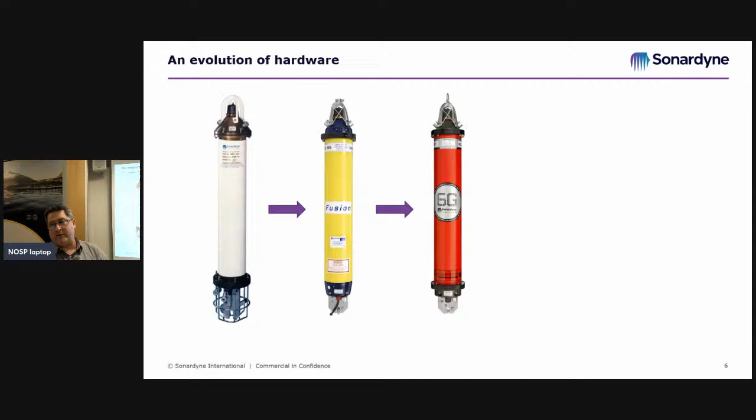But in 2010, we went with the Compatt 6. So 4 to 5 to 6, we're not very imaginative when it comes to naming our products. We just increment the number until we got to this one, which is a 6 plus. The idea being it wasn't a big enough change to make it a 7, so we just came up with a 6.

But that brought in another level of digital acoustics. So the yellow ones were our first generation, the reds were the second, the grey ones brought in the third, and that's where we are now.

So where we're going is what I'm going to talk about. And I've just got to completely put people's minds at rest - this is not a Compatt 7. So anybody who uses Compatts, I'm not talking about that. I just used that as an illustration of the development. There is no Compatt 7 yet.

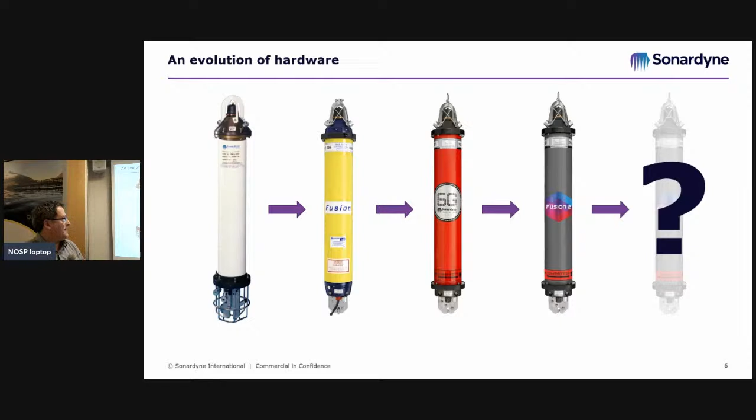So in my days offshore, thinking about how things connected and how we wired things together, it was - I wouldn't say simpler time - but it was challenging because we had different communication schemes within equipment.

For hardwired umbilicals, so solid copper umbilicals, we would go with 2-wire or 4-wire current loop kind of comms, which were notoriously unreliable. If the umbilical capacitance was too great, these comms just died. It became a real problem, especially when trying to fault find offshore.

I'd go on a boat, get shouted at by the party chief. I'd say, sorry, but your umbilical's not good enough. He'd say, no, it's not, it's your equipment. I'm going, no, it's your umbilical. It's your equipment. So it got into a bit of a boxing match there.

When multiplexers came in, we started looking at serial comms. So you're looking at RS-232, then kind of 422, 485, half duplex, full duplex, things like that. And then power was another problem. You always had different powers available on vehicles, 24 volts, 48 volts, 110, 115, 120. You just basically turned up to install a bit of kit and hope for the best and try not to blow things up.

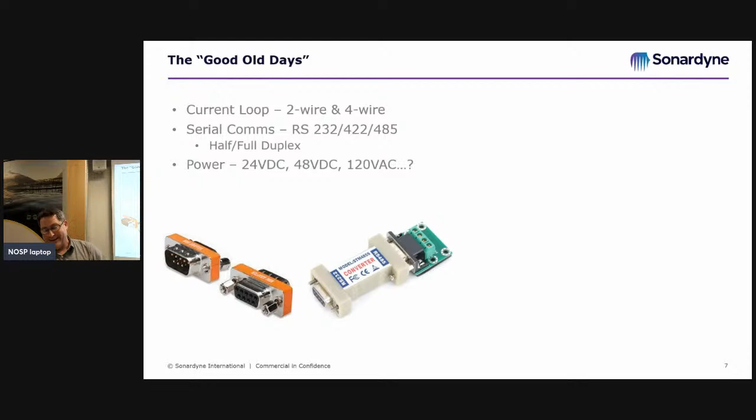But every offshore engineer, when I was doing it, always carried a pocket full of null modems, always carried RS-232 to 422 converters. You never knew. And then you'd have to try and figure out how to wire something in. So I guess what I'm trying to say is, in the good old days, it was an absolute nightmare.

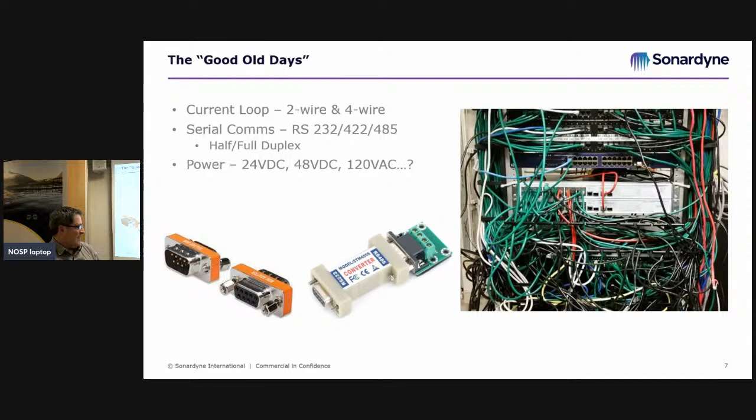And this is kind of the point I'm trying to get to with the presentation: if we standardized all this, things become a lot easier. So that's going to be the general message of this presentation.

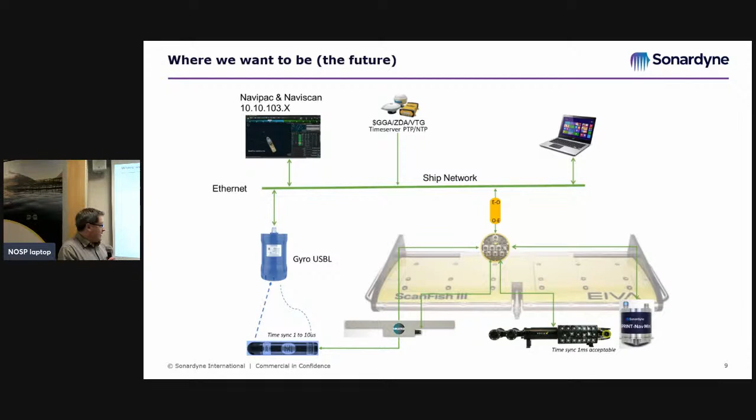So the first thing we need to do, if we're doing everything Ethernet based, is to look at power. Now, there is a thing, power over Ethernet. There are various schemes of it. We've implemented that already in a couple of our devices, and the plan over time is to implement it into all of our subsea products. So it's simply that Ethernet is able to power a connected device. There are limitations with it, which I'll get to.

And why do we do that? Well, you can see there's cost savings in the installation. Everything becomes a lot cheaper to do it that way. We're not looking at specialized connectors that can handle heavy power or fancy cabling. It becomes quite simple. It's flexible, so there's a lot of flexibility built into how you install these things.

Centralized power management, well, it's all run through the Ethernet system, so there's no real power management. It just has to be able to deliver the amount of wattage needed for the connected devices. And in theory, there's fewer points of failure. That's the important one, you're taking out a lot of potential failure nodes. A complete survey spread on a vehicle is quite a complicated system, so if you take out as many failure options as possible, it makes life easier for the guys working offshore. So we've already implemented one of the power over Ethernet standards, the PoE Plus.

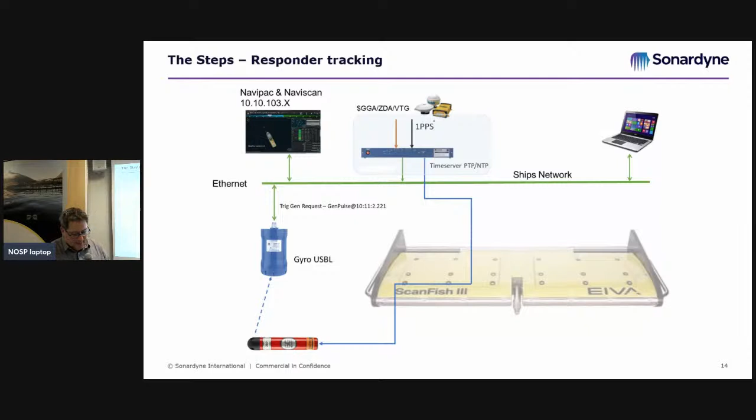So they get their master time sync from GPS. It's normal, but they're now broadcasting onto the Ethernet. And the gyro, the USBL transceivers, do a trigger generation request. The time server pings, hears that, sends its message. The gyro knows when that thing did its ping, then it'll work out the range and bearing. Again, that takes away quite a lot of cabling and hassle you would have had in the old way.

So again, a little bit more complicated. We're bringing inertial now into the target we're trying to track. In this case, we've actually plugged the transponder into the inertial device. And that's one of the things, because we build that and we build that, it's easy for us to support integration, hardware integration into the devices.

So again, we're using a time server to generate the master kind of timing sequence. That gets down to the beacon, it transmits. At the same time, the INS knows when it got pinged. And then when it works out the position of the beacon, the USBL system passes the position back down to the INS. So we're constraining the INS drift as well. So that's a kind of fairly simple INS and USBL setup.

And you can see there, if you look at the line, there's actually not a lot of cables there. We're not sending huge amounts of data through serial cables. We've got standardized Ethernet telegrams that we're just passing around the vessel, and the equipment just picks off whatever message it needs.

Then just going forward, you're adding more equipment in. You need some good quality subsea multiplexer. I don't know who builds them, Stig.

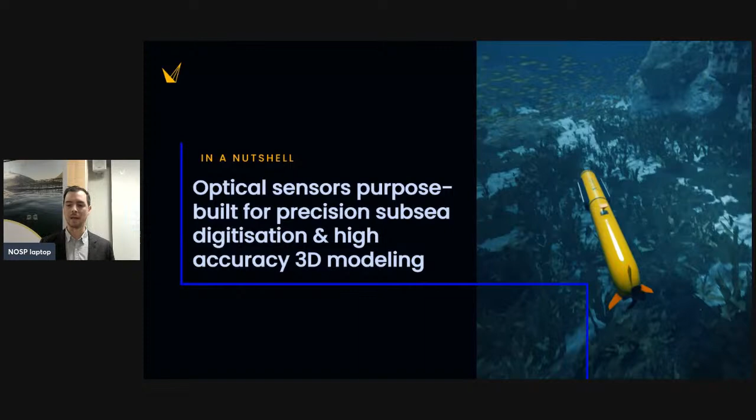Brief introduction: Voyis as a company, in a nutshell, we're making optical sensors purpose-built for precision subsea digitisation, mainly for high-accuracy 3D modeling. That culminates in a few categories of products. First and foremost, underwater laser scanners, using a laser line projector to project a line onto the surface, seeing that line with a camera. That camera is at a bit of an offset, triangulating points along that laser line in 3D space to produce an XYZ point cloud model. We also have some cameras and lights for really high definition, very crisp imagery subsea while on vehicles moving at very fast speeds. We've taken the camera and laser concepts and started to build these pre-packaged payloads for AUVs and for ROVs.

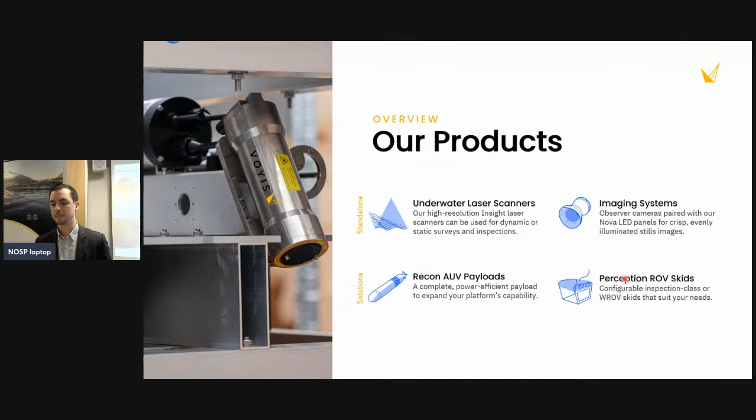A little bit more about our company. We are headquartered in Waterloo, Ontario, Canada. One of the things we're proud of is we were one of the first dynamic laser scanners on subsea vehicles. That was the Hugin, manufactured by Kongsberg in Norway, for a company called C&C, now Oceaneering. We had our laser package on there back in 2011, flying over hundreds of kilometers of pipeline and producing 3D models of those underwater assets.

And like Alan said, we are part of Covelya Group as well. This acquisition happened 2 or 3 years ago. It's been a really great experience to be part of that acquisition. There's quite a bit of synergy between these companies that are all subsea, many sensor companies owned by the same group. Especially Sonardyne, which makes acoustically aided inertial systems to understand where the vehicle is moving subsea. Wavefront makes some side scan type sonars, and Voyis comes in with the optical imagery and the lasers, with EIVA, a topside navigational software company, amalgamating all these sensors and presenting it to the user in a usable way in real time topside.

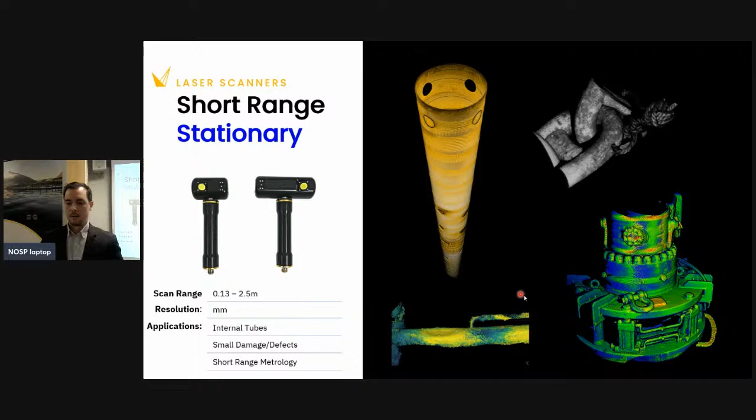A couple of years later, based on that short-range technology, customers came to us and said, that's great, but can you do it longer range? And can you do it on a moving vehicle? So not stationary anymore, but utilizing the inertial navigation system with the laser scanner to project a laser line at the surface and fly over seabed, producing a 3D model using all these sensors.

So we made this long-range laser scanner, same concept. You've got a laser emitter on one side, projecting a 50-degree laser swath onto the surface, and a camera specifically designed to see that laser. Because of this known offset, we've calibrated it so we can triangulate that laser line in 3D space.

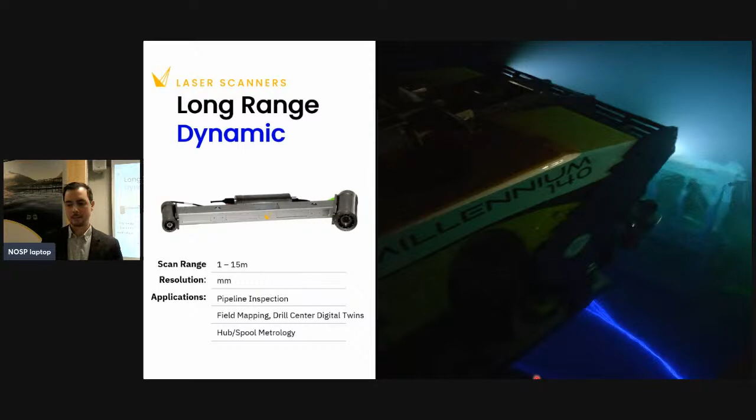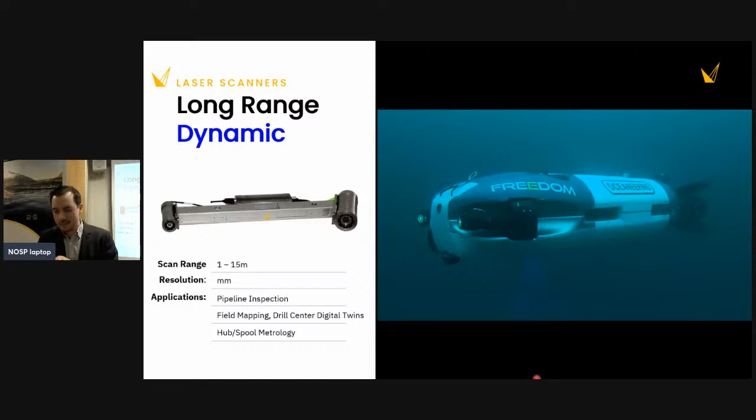We've seen this being used on AUVs and ROVs for pipeline inspection, full field maps of drill centers, essentially creating a digital twin of your subsea assets. Here it is on Oceaneering's Freedom vehicle. You might not be able to see it well on the projector, but you can faintly see a 50-degree laser swath being shot out of that.

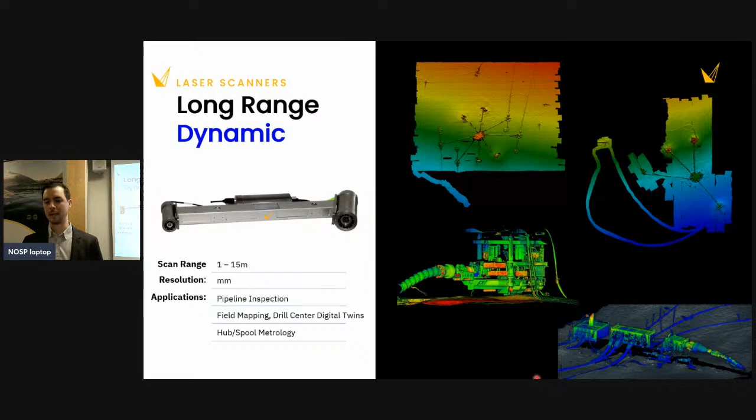As I said, some of these drill centers do a sort of lawnmower pattern, back and forth, building up a full wide digital twin of the area. But if you were to zoom in on any one of those field maps, you'd get down to the resolution and accuracy that you see here.

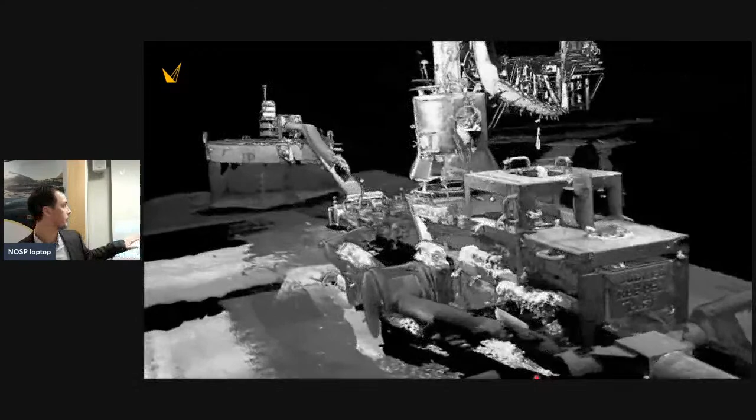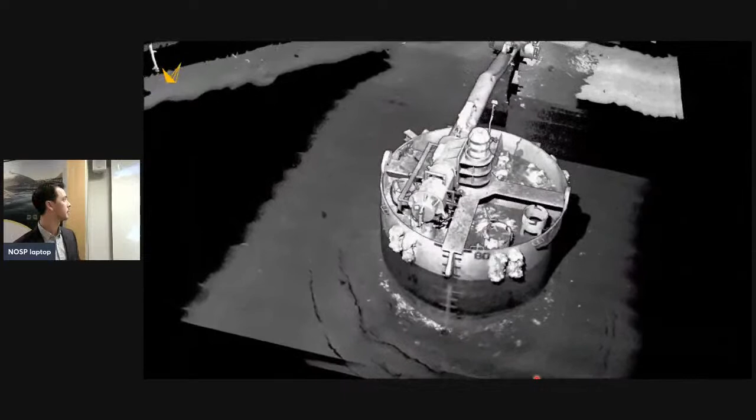And this is only laser-based systems, none of our stills cameras involved in this. Again, all collected dynamically. So as the ROV flies from point A to point B, all that data is being streamed topside, presenting a result like this.

To give you an idea of a data set of this size, to collect it probably takes on the order of 10 to 15 minutes.

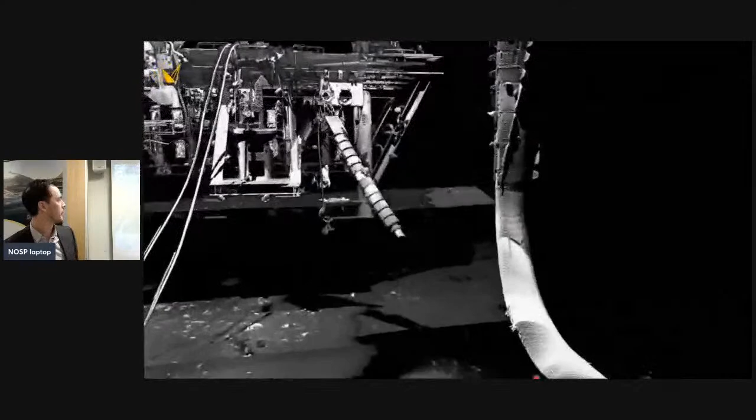Flying over the jumper to the manifold here. We've been used for jumper metrology, spool metrology, so tying in a plet or some other structure over to the manifold, figuring out the relative X, Y, Z and yaw, pitch, roll of those two hubs or flanges, and then allowing the customer to build the spool piece.

I've actually worn VR goggles and dove into some of those drill centers, and it's quite different from looking at it on a computer screen. The size of these structures is immense.

So moving on from the laser scanners, we started to develop a line of stills cameras and lights. The idea being that some end clients wanted the stills imagery, and some of our customers were using their own cameras with our laser system. But in order to use their own cameras, they didn't want to see the laser in all their images, so they'd have to inhibit our laser, stop it, take a quick picture, and start the laser again. That all happened in software, but still, as we're flying over a pipeline, you'd see a gap in the laser data every so often, and it's not that pleasing to the eye.

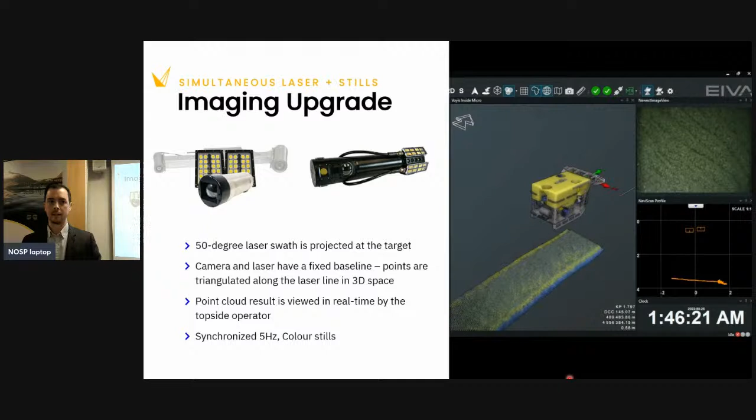So we decided, you know what, we'll take on the camera side of things as well. We have very tight timing on everything, doing up to 50 laser lines a second, collecting those all in real time, and in between the pulses of the laser, we're able to flash the light, expose the camera, and collect an image all before the next pulse comes.

So the software here, that's from our sister company, EIVA, is amalgamating all the sensor data. You see our images being collected up there on the very top left, and the data coming in as point cloud data.

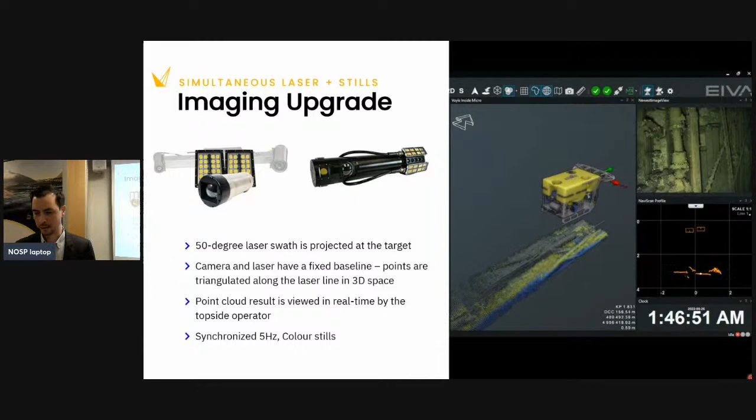Here we are. We were used on the Endurance mission, surveying Shackleton's famous shipwreck under the Antarctic ice. A very similar package to this, laser scanner and camera installed on a Saber-tooth vehicle, 3 kilometers deep in the ocean, surveying that wreck with both the cameras and the lasers.

And then, so we had the cameras, we had the lasers. What we were finding was that customers have all sorts of different vehicles. Even if they had the same vehicle as another customer, let's say some sort of AUV, it might be a different rev, a different year, a different model. And it was always such an engineering feat to figure out how to make our systems first mechanically fit, and second, communicate with their vehicle systems.

So we decided to pivot from that idea and try to make modules that work directly with the vehicle manufacturers. We felt like we could reach a broader audience with our sensors if we worked with these vehicle manufacturers.

This is just one example, but this is an Iver 4-900, about a 9-inch hull AUV. It looks a lot bigger in that image, but they're really small. It has our camera, our laser, our light, and we manufacture this entire section that just straps onto the vehicle portion of the AUV, giving you the ability to do laser scanning and imaging.

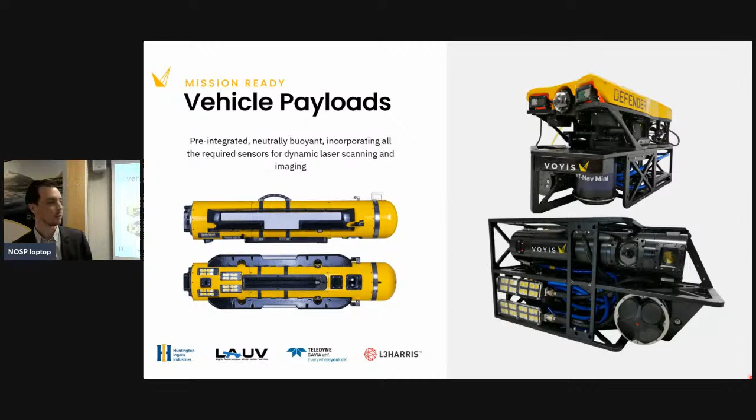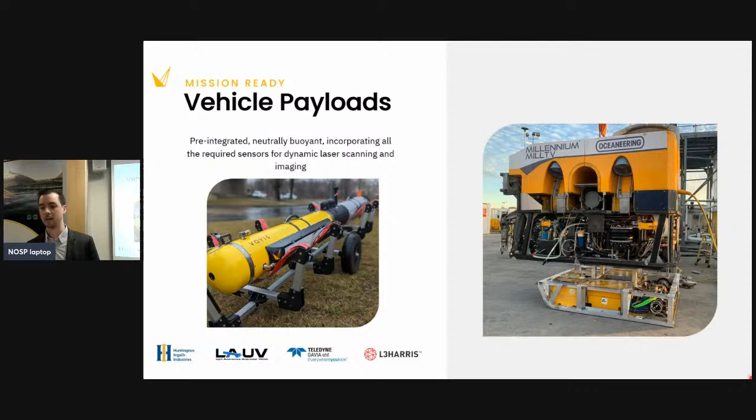I should also briefly mention we still make this work class dynamic scanning skid. It's a collaboration between us, Sonardyne, and Innova. Innova really designed and manufactured the frame of it. There's also an Innova MUX on there, so all the sensors within that skid, everything you'd need to do dynamic laser scanning, goes into the Matrix MUX from Innova, and then it's just a simple one cable connection to the vehicle.

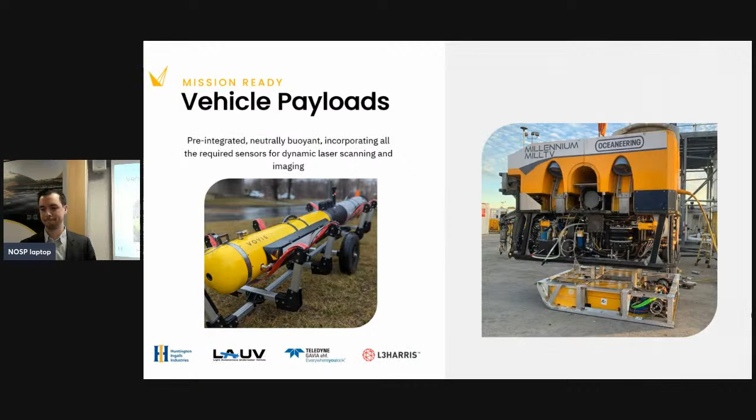So this is where edge computing comes in. I'll give you my basic definition of edge computing, but it's basically placing the computation as close to the edge where data is being created and where actions are being taken.

This largely stems from the industrial industry, where you may have a sensor that's close to an actuation, and that sensor data is being sent to some server or cloud to be processed, and decisions are made and sent back to the actuator. So the idea is, if we can get that computation, that processing, on the sensor itself, right next to where the work is being done, then you can avoid that whole step of sending that information elsewhere.

Traditionally, we've always had some form of edge computing on our products. A lot of the times with our old products, it would culminate in this single board computer, basically just like a PC in a bottle, where we would send our images from our laser scanner and from our camera, do some processing, and spit out a laser stream or processed images. Those would go topside to be saved, to be looked at afterwards.

They could be streamed to a computer running EIVA, so you could see the result of the survey in real time. Or they could be fed to the vehicle to do automated pipeline tracking, auto docking into subsea resident spaces. So that's sort of how we did it in the past.

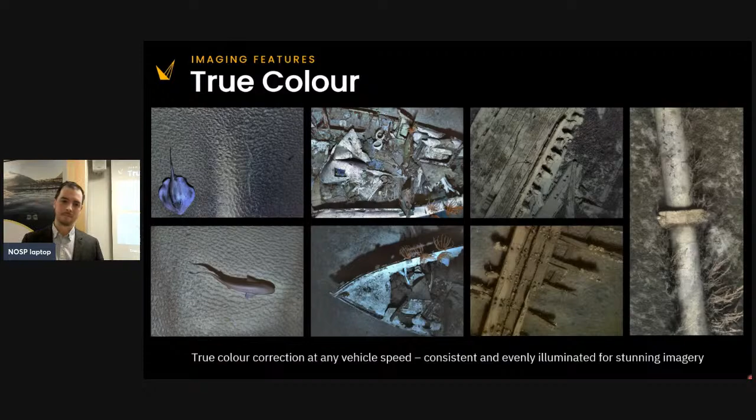I guess because of the way that we're doing this computing, the moment that you pull those images off board, they really lend themselves to stuff like this, where it's a very consistent mosaic where you can't see where one image begins and the other ends. Really great for something like a pipeline where you have maybe some 3D data from a multi-beam or a laser, and then you can drape this mosaic over top of that to get more detail out of the asset.

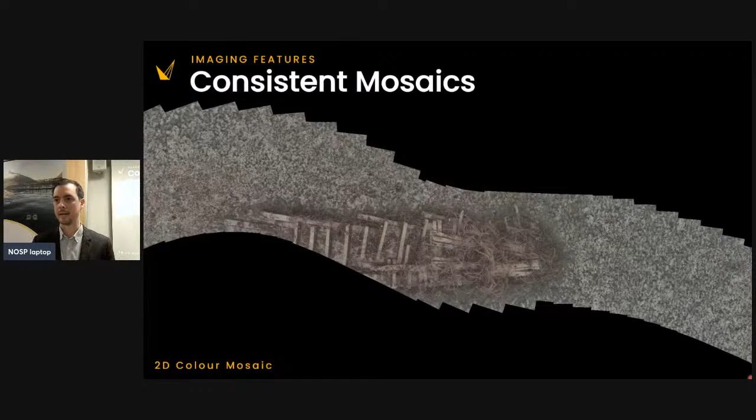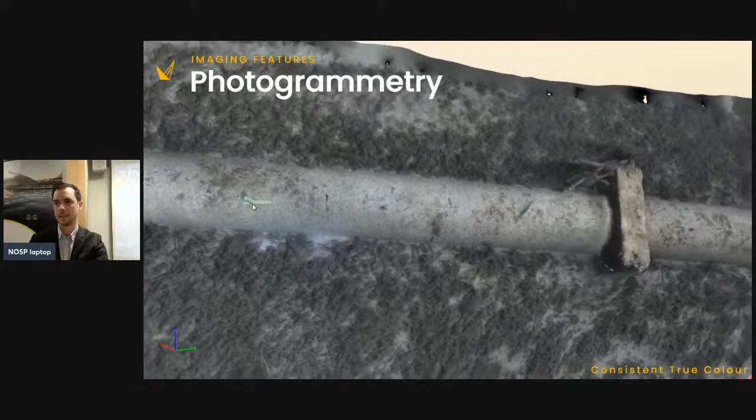Also really lends itself to photogrammetry, so creating 3D models not from laser data but directly from the images. Because of the consistency in the imaging and the lighting, and the way we process those images, sort of mimicking how a camera would work in air, it works really well with some off-the-shelf software. You just throw the images in and it'll spit out a nice 3D model.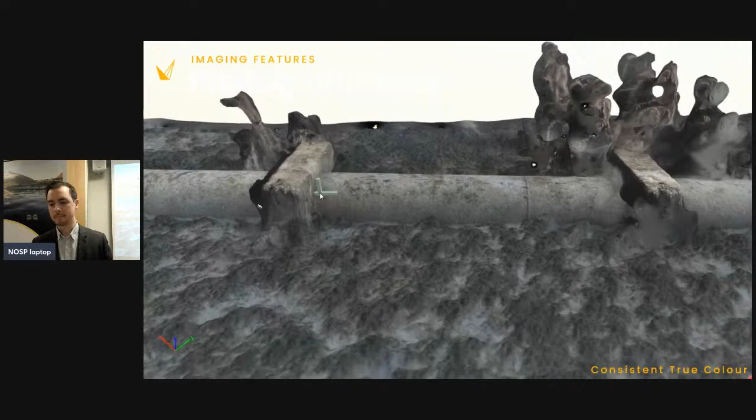So that's sort of the survey side of laser and stills imaging. But where this has all sort of been going over the past couple of years is we've realized that with this edge computing technology, we should be pushing more into the video market. So we have what we're calling Video Plus, which does video and stills and 3D modeling all in one small unit. We really asked ourselves, why isn't every underwater vehicle outfitted with a vision system capable of 3D modeling?

There's stock video devices on ROVs all over the place. If you try to throw that video randomly into a photogrammetry software, generally you'll get subpar results just based on the spec of the camera being designed specifically to collect video and not necessarily to 3D model.

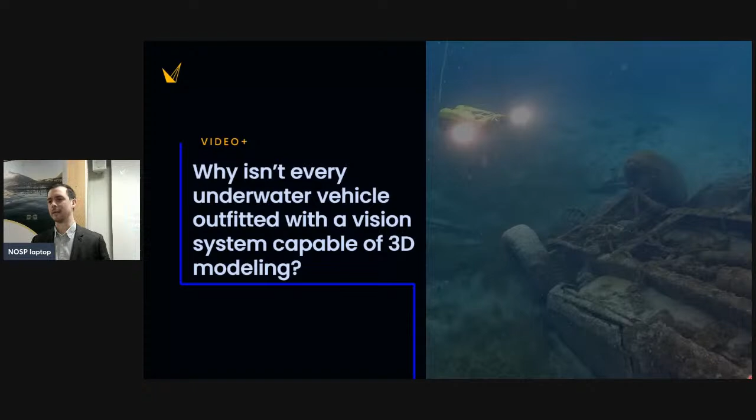So this is a small little camera we developed. Again, the VideoRay Defender there, if anyone knows that vehicle, it's pretty small. I'm a pretty small guy, but I can lift it up and chuck it in the pool. Yeah, it's small, and within this camera bottle here, we do have one of those edge computing devices in it that's capable of doing many things.

So the way that we've sort of approached this video is we've done a stills to video approach. It's actually exposing the camera with its global shutter 30 times a second. Each of those images is going onto that embedded computer board. It's being undistorted, leveled, color processed, the same way that I just showed you. And then being encoded into video, so that the video that you see is actually 30 rapidly processed stills.

So it's encoding that, streaming that video up. That video could be used for ROV piloting, for a GVI deliverable. But at the same time, it's also able to save those raw stills to a separate location. Those stills actually contain a lot more information than the video—the video does a bit of compression when it creates itself. So it's important that we actually use the separate stills that we've saved to produce the 3D models.

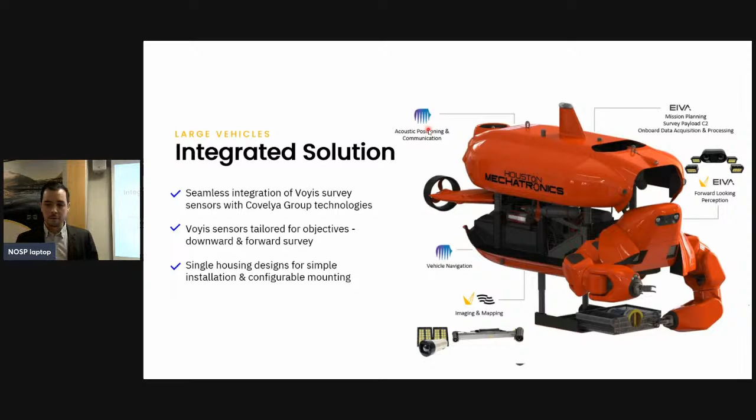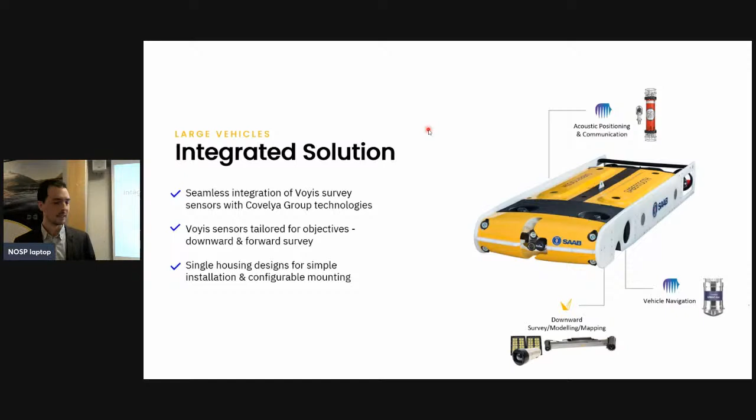Another up and coming vehicle we're on, the Nauticus vehicle, has the full package from Voyis. As I mentioned, Sabertooth—a couple different customers using this, but notably the Endurance mission using the Sabertooth. Oceaneering's new Freedom vehicle is largely doing a lot of pipeline following with that vehicle going on.

And that's it. Hopefully it wasn't too much.

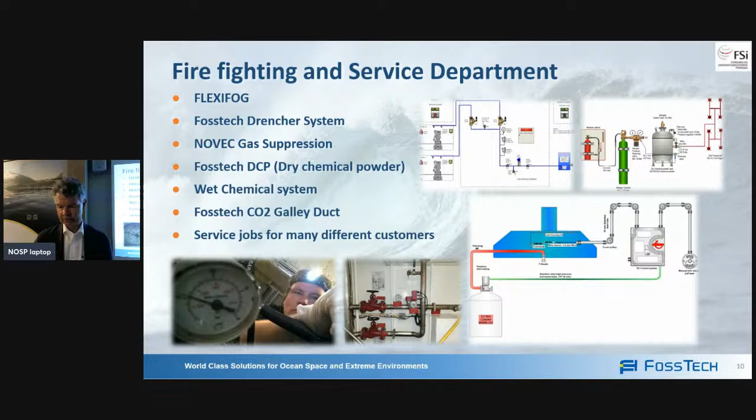A couple of years ago, we took over from another customer a service department, doing service for firefighting for ships. They're big ships, ferries, yachts, and they have to be certified each year. So we have people traveling all over the world, doing service for the FossTech products.

It's important that when we do R&D work, we have facilities to do testing, and we can go to our customers and say we can guarantee it for 25 years because of the accelerated tests. So that's important from our side.

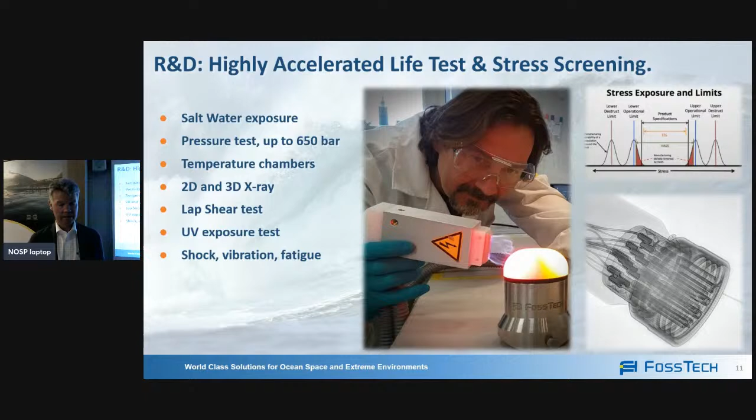Our own products, we have a product called Omicron. That's really good, and we were first out. This is a sensor for measuring gas levels in LNG tanks. I think Omicron means a small particle, and our sensor going up and down here is what it is.

We've talked about the oil-filled cable, our IP around molding LED lights, our fishery equipment, and the firefighting systems. I have a couple of products there. Lately, we have set up a production line for batteries for bigger ships, and batteries are coming more and more. What is special?

What we do is mold the batteries in a fire-resisting molding mass - you can see the yellow ones here - and you can put it in water if you want. There have been some fires on ferries with batteries, and this way of doing things takes care of security, and you can also cool it with water if you want to. The old batteries for ships had to be put in a container and cooled inside the container. So we look forward to getting this into the market.

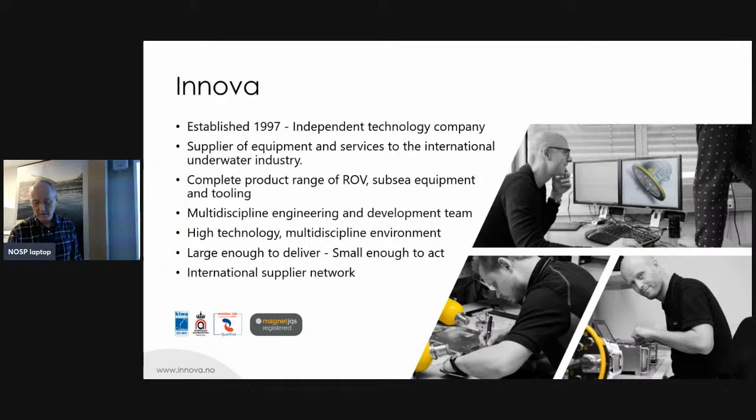We like to promote ourselves, both to customers and possible employees, as a high technology multidiscipline environment, with the statement: large enough to deliver, small enough to act. We have a quite strong network of sub-suppliers on engineering disciplines that has enabled us to do some really interesting projects. We also have very good cooperation with companies like Sonardyne that we work closely with, both on the product side and on developments, aiming to standardize what we're doing.

That gives quite a pointer in here - is it live, or I need to see if we can do that without ruining anything? So there, it is on this screen - but no, here it is.

Right, there you go - control electronics, mostly for pressurized environments. We don't pot things as much as you do; we're very much putting it in oil to be able to. This board, I think, is one of the first things we did, and that's just an example.

I think we're now on a new version doing really the same thing, just including more Ethernet, which we'll come back to. I think this is sold in close to 1,500 examples, sitting worldwide in equipment from Scanmudring's excavators to Frank Mohn's oil skimmers, and a magnitude of kit you really wouldn't imagine. But the core is really oil and gas related remote tooling and ROVs of any kind - so it's a proportional valve controller and then a set of I/O running on a serial line.

Camera and video systems, we don't make them ourselves - we sell them on behalf of others. Hydraulic valve packs - that's almost entirely built in-house, buying valves, making everything else. Fiber optic systems, we'll come back to that in more detail. We have good cooperation with Forum as the rep on ROVs, also selling their thrusters, the previous Sub-Atlantic range.

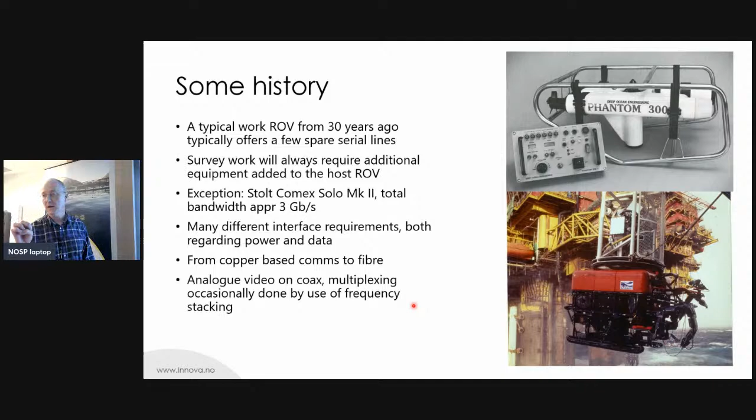Your baseband video is like 5-6 megahertz from 0 and up. It's what you get when you run a standard monitor if you don't have any receiver involved. In the old days, you had to go and tweak the channels on your TV in the UHF and VHF band - you were changing the frequency you were looking for. And we built systems when I was at Oceaneering to use a similar system to run many cameras on one coax, because that was the only thing that was left.

More history, and this surprised me a bit - I tried to find out where all these standards come from. When I went to Ørlandhaug, where you guys are from, it was RS-232, RS-485, and I don't think they mentioned Ethernet. It was actually existing at the time, 1993. The ROV system over at the Dolphin's ROV from around 1992 still doesn't have any Ethernet bits and pieces in it at all. Ivan Brems, one of my colleagues, used to work there for many years, and he said it's still copper-based, and so on. The specs are actually quite old, as we can see later on.

The specs we are looking for that Alan also mentioned are close to 15 years old. Some of the bits and pieces we need are 5 years, but they've been around for a while. We are possibly not the last industry in the world to adapt these things, but we are certainly not the first. We're not a consumer gaming environment, but I think we are on equal footing with perhaps aircraft industry, medical, and so on. The speed at which we're able to use the standards existing may be improved a little bit, but that needs to be a joint industry thing.

We have latency there. Some of the equipment built utilizing really old style stuff is built 5 or 10 years after the appropriate standard actually existed.

One example is PECL, positive emitter coupled logic, introduced by Kongsberg and Reson approximately at the same time when they started building multi-beam sonars that needed more than 100 megabits. But it was still many years after the gigabit standard existed, there was no hardware available, and you couldn't really count on the ROV to be able to transfer it.

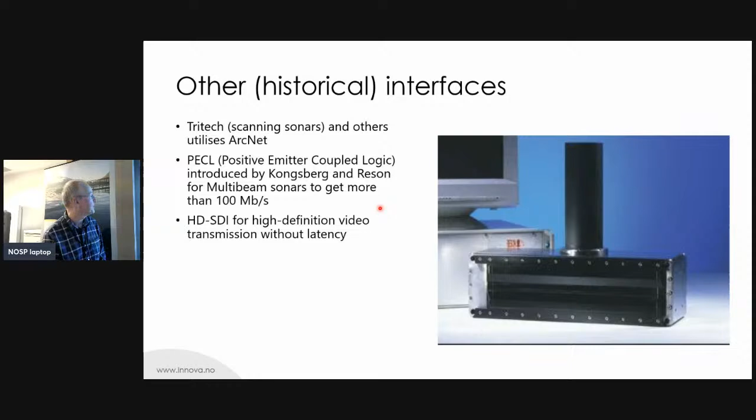Moving to the present: the majority of ROVs still do not have a lot of capacity. There's one or two exceptions, there might be more of them, but we know of these quite big vehicles made by Kystdesign. I think they made 2 or 3 of them.

I guess you might be using them in some contexts. I don't know. Have you seen them in use? Yeah, and I think the first customer was MMT.

I think that was made to be able to run 8 knots. When I talked with some of the people using it initially, they were scared to death when running at 8 knots really close to the seabed.

I think one of the first jobs they did was a survey from Iceland to Scotland, and I think they did it in 3 times less time, vessel days, than they usually have. But it's a very specific thing, you can't use it for anything else. It's expensive, and it's based on the same electronics all the way through, the same fiber optic board or the full package. So we're involved in that one.

PECL has been replaced by gigabit Ethernet for multi-beam sonars, and you're also utilizing gigabit Ethernet. That's what you need.

IP-based video is becoming accepted, giving still some latency. You gave us a very good number of that now, and people are accepting it for everything except for the navigation camera for the ROV pilot. They still prefer to have something direct.

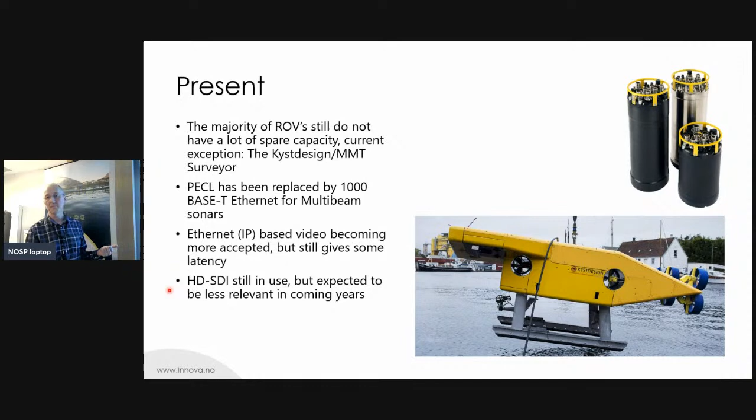On our big muxes, I think it's still standard with 3 times HDSDI, but that's a raw data format, and depending on how much you scan it, it's 1.2 or 2.5 gigabit per second per channel, which is very hungry on bandwidth. That is still in use, but several of our key customers keep telling us that, as we're upgrading all our electronics these days, we might not need to make a new HDSDI board due to the effects you've also been mentioning.

ArcNet has fallen out, I didn't say a lot about it. It was the core of some sonar systems earlier on that just went one step past the serial lines. Tritech used it, Oceaneering used it on ROV control systems in the early 90s, and that was hanging on for quite a long while, but has disappeared totally.

Serial lines, which we could see earlier on, basically started out with the first specs in the 1960s, and were predicted by some really major players in the industry to go away very soon. That was like 3-4 years ago, and they said maximum 2 years.

But there's still a lot of smaller bits and pieces, and you can see some of them out there on what you call the workshop, and they are still only delivered with serial outputs. So we're somewhat caught in there, and there's a way still to go. So that has not gone away.

PPS, the pulse, is still there, usually TTL signal, because Ethernet is in its nature not deterministic on time. It has been a key selling point for us, both on our electronics and for boxes, that we know within the microsecond when things are going to happen on the other end, as long as we don't introduce any packet switching or something. On any channel, it's either 6 or 7.4 microseconds, whatever it is, plus the propagation time, and that's the same every time you run it.

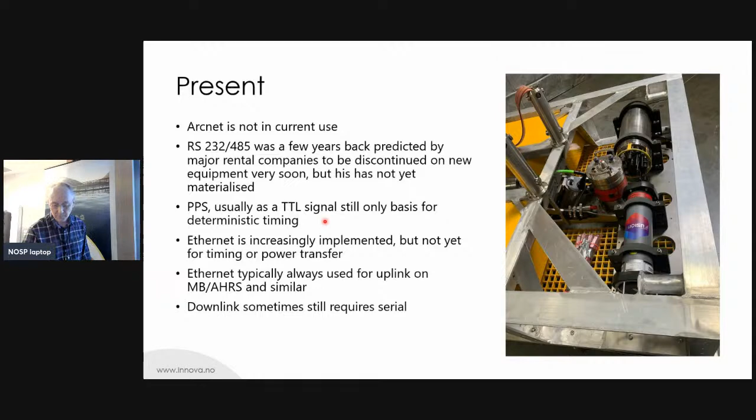Current MUX manufacturers, obviously, I made a little bit larger pictures of, didn't want to hide our competitors. This is MacArtney's Nexus, which you occasionally see. They also own a company in the States making very small MUXes, EMO. And obviously we also have our friends up in Haugesund who do the RTS MUXes.

What we have seen as our main stronghold has been really on the diagnostics and power distribution system, everyone running a solid case on the signals. But when some of these others started serial production, which we were again very slow to do, we love building prototypes with an enormous consumption of hours, and everybody can get exactly what they want, but never make money on it. So they are much more clever in standardizing something.

I think we built 10 or 20 MUXes completely different before we finally forced ourselves to build the Mark 1, which solved absolutely everything, cost double of everyone else, and we sold 2. It's enormously large. And okay, this is what you asked for.

No. So we built the Mark II, which solved 92 or 94% of the problems, which is more than enough for most of our customers. Much smaller, half the price, and then we're really in a good range.

Then I think we ran into something similar to what someone else mentioned. We did a Mark II Plus, using some of the same reasoning. We did upgrades that are not, in most cases, visible - better on EMC, better on mechanical vibration, the whole kabang, and also upgraded the surface unit, but the interfaces are essentially the same for the user side. I think you can use almost all the cables straight in without changing anything, which is also a key point.

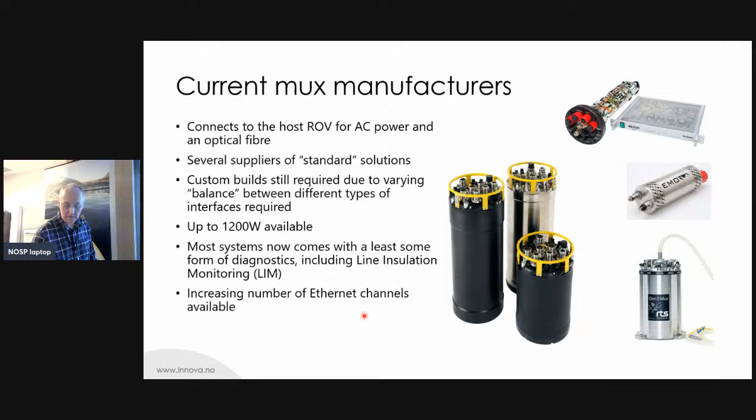I think we have not been so clever, and I've been blaming Sonardyne for being the largest user of different types of connectors. It's the same engineering enthusiasm running there as we have. Everybody wants it exactly the way they want it, but that ends up with nothing being able to plug into anything else except by making a very dedicated cable.

This is the best discussion we have in big rental companies. Most of them have now passed a pool of cabling worth more than £1 million. They're getting to the point where they have dedicated people trying to keep track of the types, the qualities, and the wirings. It could potentially be cut down to a third or so if we can just get down to 2 or 3 types, ideally.

I think I'm good so far. Regarding timing, I think Alan touched into this.

We have mentioned this. When you go through a switch, there's no demand from the basic Ethernet specification for a specific time for this to happen. So as long as you run a gigabit channel, it's usually a point-to-point thing where we just convert light to electricity and back. It doesn't affect the timing. But as soon as you run into anything with a switch, you need a switch that is prepared to keep track of time in a deterministic way.

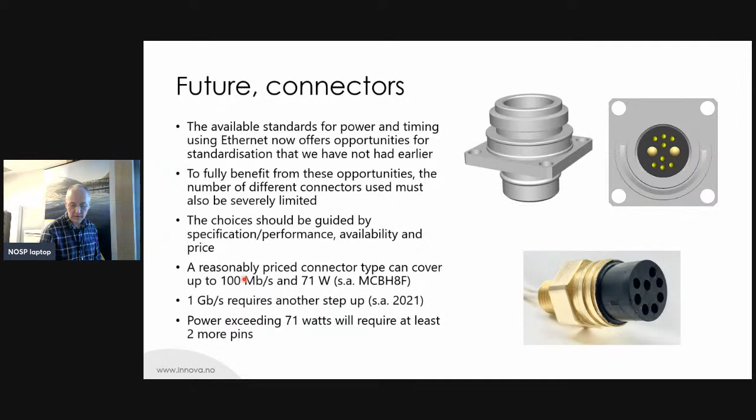And then I think we need to involve, that's the next slide. It could be possible then in 5 to 10 years, if all equipment manufacturers have ended up with only PoE devices, you can have 2 types of plug, and you can run practically anything. Obviously, there is a need for a gradual transition. We can't go directly to that step, because there's not enough kit existing.

But as you say, Sonora has started making PoE devices, and we are talking with 2 or 3 other major suppliers that also are prepared to start making them in a very short time. The electronics are really prepared for it. They're just on the device side, but they don't make them because no one has asked yet. So I guess that will take a couple of years.

So users, operators, I guess SUT and NOSP, FFU, that type of, because we as the manufacturers can't run this alone. That needs to be coordinated on a higher level.

And our input on that, we are preparing our next generation. You can see a mock-up of the micro MUX sitting out on the workshop side. On the single board there can offer each of these 3 times Ethernet gigabit, 8 logic lines, and you can also put an expansion bus to expand quite a lot on this, also including PoE boards later on. It's not in there yet, but it's meant to be able to do it.